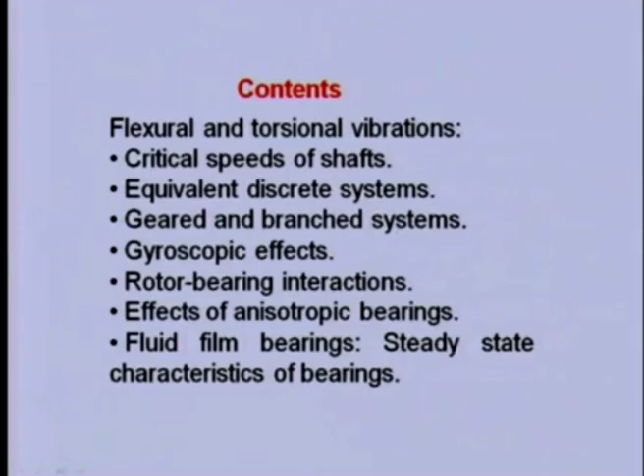Another important bearing is the rolling element bearing. We will see how it imparts stiffness into the rotor system. Generally these are called frictionless bearings, so the damping is less in these bearings. So the property which these bearings carry is stiffness.

Apart from that, the rotors have some kind of instability. There are various ways this rotor can go into the unstable zone. We will study this in more detail. One example is the fluid film bearing itself, which gives instability because in this case we have cross coupled stiffness and cross coupled damping, and they lead the rotor into the unstable zone.

And apart from that, sometimes the rotor has asymmetric area moment of inertia in two orthogonal directions. That also leads to instability because of the parametric excitation of the rotor. When it rotates, this stiffness changes along with the speed, and that gives some kind of parametrically excited vibration.

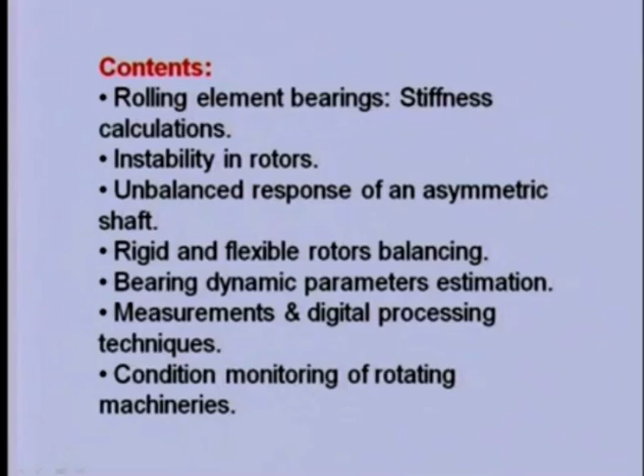Then we will see the measurement and digital processing techniques, especially as we know that in rotating machinery, the dynamics taking place inside the machinery manifest in the form of vibrations and acoustics. So we will see especially the vibrations, how they can be measured, what are the different sensors available, what are the different analysis softwares available, and what techniques exist by which we can process these measured signals and analyze them, especially for the purpose of condition monitoring. We will also look into various kinds of faults a rotating machinery can have, and how they can be monitored through vibration measurement.

Just now we have seen the overall syllabus. This is the overall syllabus, but as we go into more detail, we will have more idea about the subject. Now let us see briefly how I have broken these lectures topic-wise, so we have some idea. These are the module-wise lectures. I may deviate a little bit here and there, but this will be the overall distribution of the various lectures.

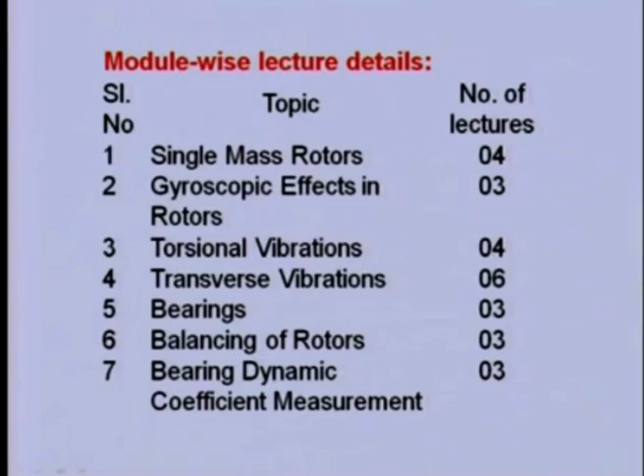Single mass rotor analysis will be around 4 lectures, gyroscopic effects in rotors around 3 lectures, torsional vibrations 4 lectures, transverse vibration, which is a major concern in rotating machinery, will take around 6 lectures, bearing property estimation covered in 3 lectures, balancing of rotor, that is flexible and rigid rotor balancing, 3 lectures, then experimental bearing dynamic parameter estimation, 3 lectures. Apart from this, instability, which is a major concern in industry, will cover 4 lectures. Then there is a phenomenon, subcritical speed phenomena, covered in 1 lecture. Then a very important tool, FEM, finite element analysis of rotor, will cover 4 lectures, and measurement and signal processing in 3 lectures.

Condition monitoring we will cover in 2 lectures.

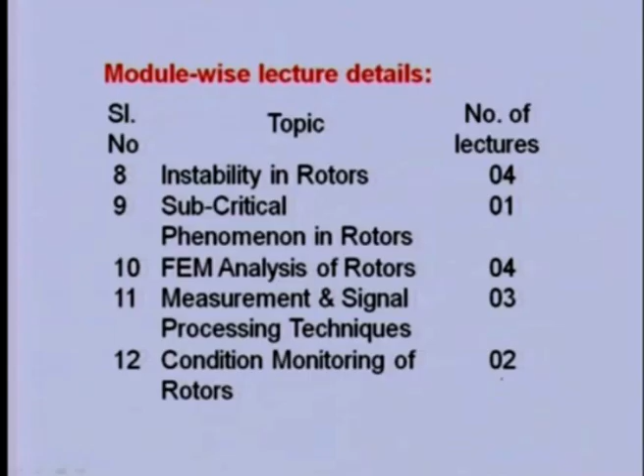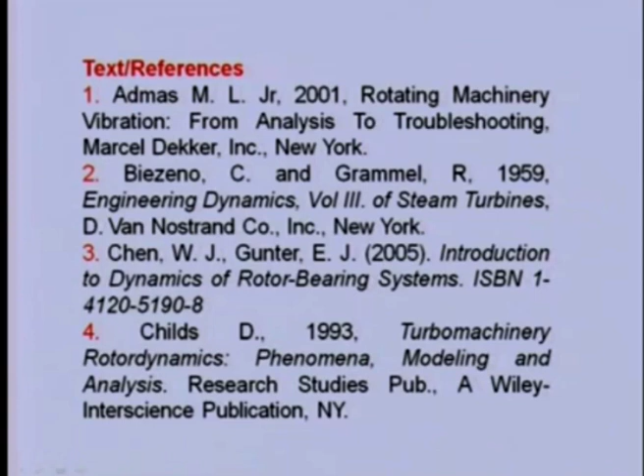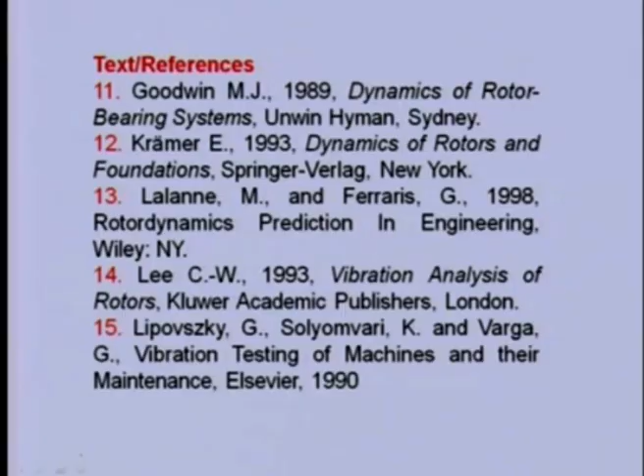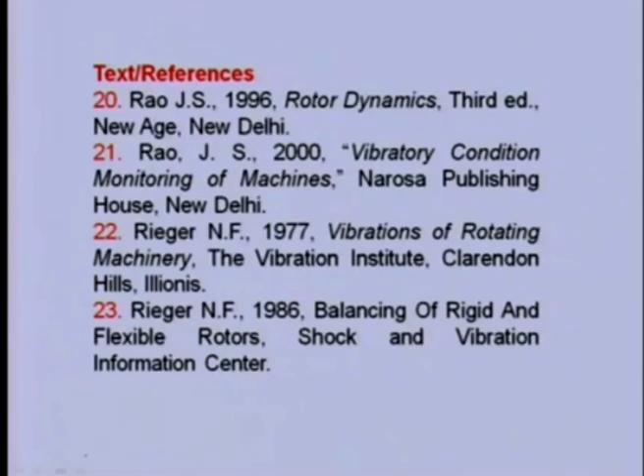These are the various references available. Mostly these references are monographs, where researchers have done their research on rotating machinery and compiled it in book form. These are not textbooks, so I am just listing so many reference books. I cannot read all of them, but you can look into them. These are all text or reference books. There are so many books on this particular topic, all written by eminent researchers in this field. Around 27 books are there, but mostly they are compilations of people's research.

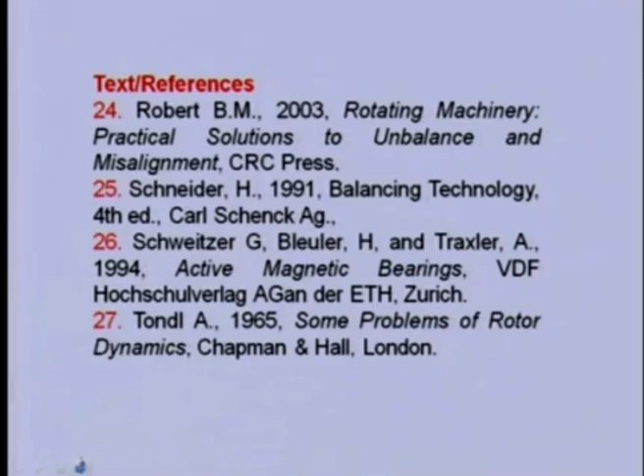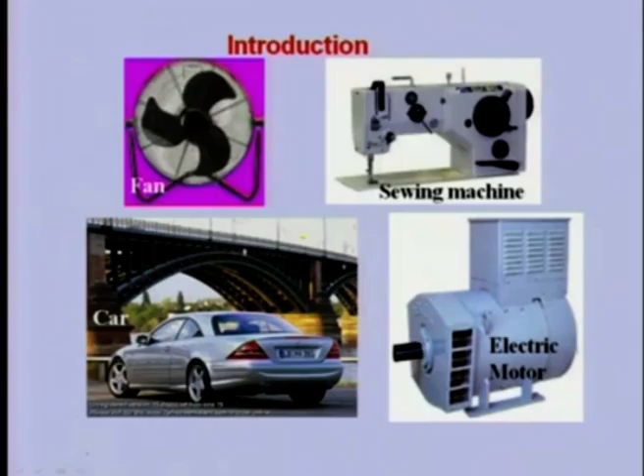So you can see some applications here, like a fan, sewing machine, or car. In these, so many rotating components are there, like an electric motor, all containing rotating parts. Or even a helicopter, where you can see tremendous amount of power in their blades, not only the main blade but also the tail end blades.

Now let us see how a turbine in actual industry is there. You can see a huge turbine with a lot of blades, and in this, a tremendous amount of rotational energy is generated.

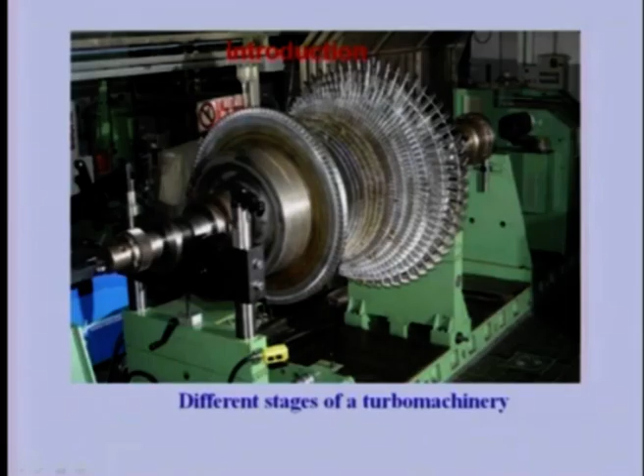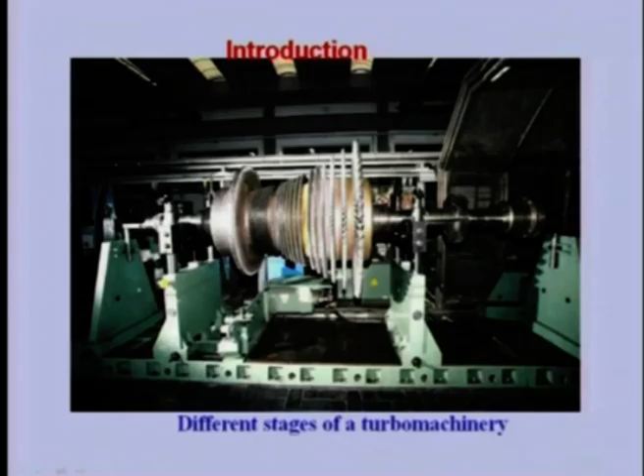This is another view of the same turbine. You can see different stages of the blades. This is the gas turbine in the aircraft engine.

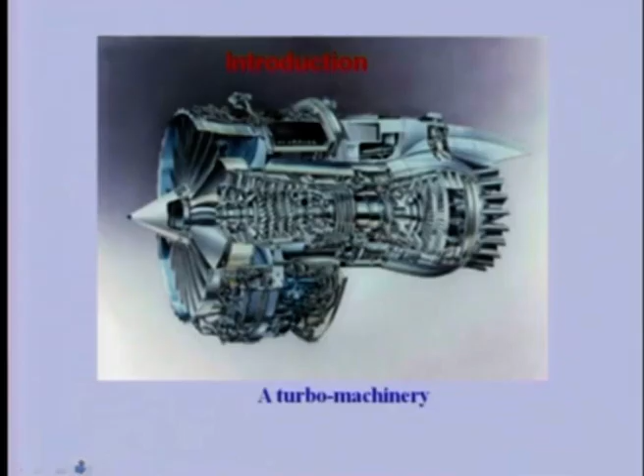Now let us see various components of a rotating machinery. The first thing is the shaft, on which various revolving parts like blades are mounted.

This particular shaft containing discs, blades, everything, that is called rotor. So all the parts which are revolving along with the shaft are called rotor, either in the form of disc, blade, or coupling—any parts mounted on the shaft is called rotor. Apart from that, you can see the bearing which supports this revolving rotor.

The bearing allows the relative motion of the rotor along with the stator. Stator is a non-rotating component, which includes the foundation, in which these high rotational energy rotors are kept. These foundations absorb whatever vibration energy comes from the rotor, and it reduces the vibration of the rotors.

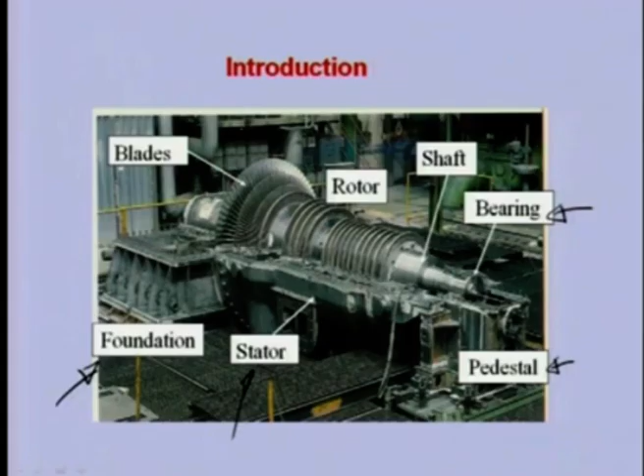So we have three main components in the rotating machinery: there is a rotor, then bearing, and the foundation.

As we go along this subject, various terminology is used in rotor dynamics. So first let us see what is rotor. Again, I am repeating, we already saw in a turbine.

This rotor is nothing but all the components which are mounted on a shaft, including the disc, coupling, blades, fan—any component which is rotating along with the shaft is called rotor. There is a stator which is a stationary part that does not rotate, and in between these two there is a bearing which allows the relative motion between the rotor and the base, that is the foundation or the stator.

Now these rotors, as I told, contain very high amount of rotational energy, and as a rotor dynamics analyst or designer, one has to be very careful that the rotational energy should be maximum, and the vibration energy—because of the flexibility of the rotor or the bearing or the foundation—should be minimum, because that is unwanted for this kind of machinery.

If this is the geometrical center or center of rotation, and if the center of gravity is also at the same place, then there will not be any centrifugal force. But if the center of gravity is offset by some amount from the center of rotation—let us say G is the center of gravity—then you can see that there will be a centrifugal force which will be m e omega square.

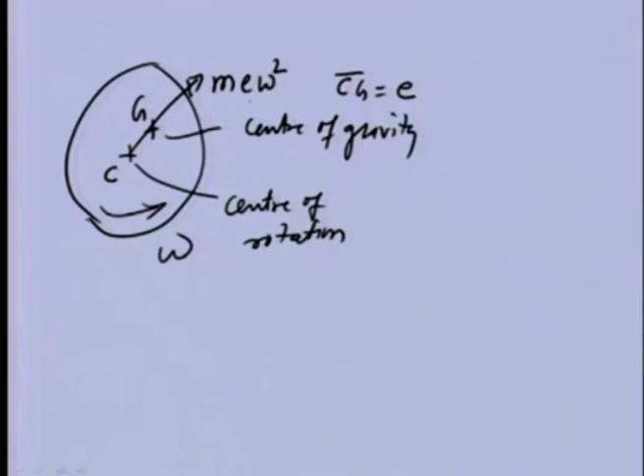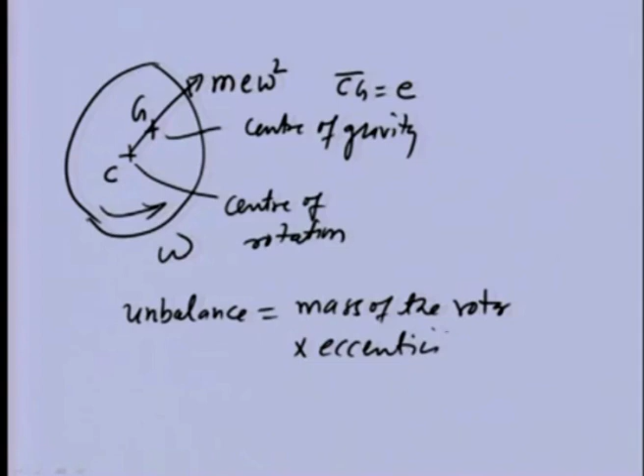M is the mass of the rotor, E is the eccentricity which is the distance between C and G, and omega is the spin speed of the rotor, either in radians per second or in RPM. Here we can use radians per second. When the center of gravity is offset from the center of rotation, we have this unbalanced force. So in rotor dynamics, unbalance is defined as mass of the rotor into the eccentricity. The unit of unbalance is kg meter.

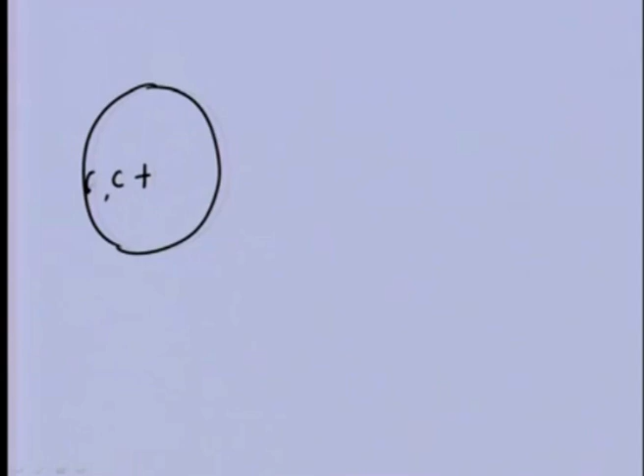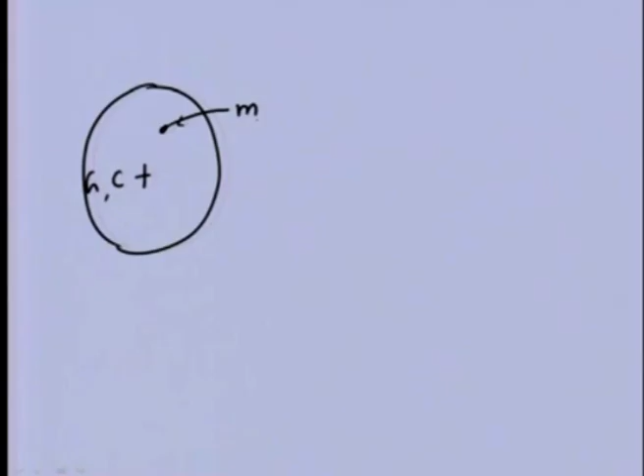Unbalanced force can come because of some other reason also. If this is the center of rotation and center of gravity is also at the same place, but we keep a small mass in the form of a screw, or either add some mass here or cut it out from the rotor, let that be small mass mb at a radius r. In this case, when this rotor is rotating, we will be having centrifugal force, and the value of that will be mb into r into omega square.

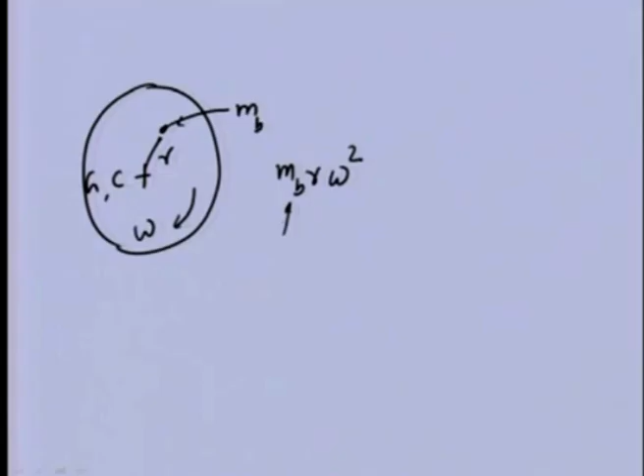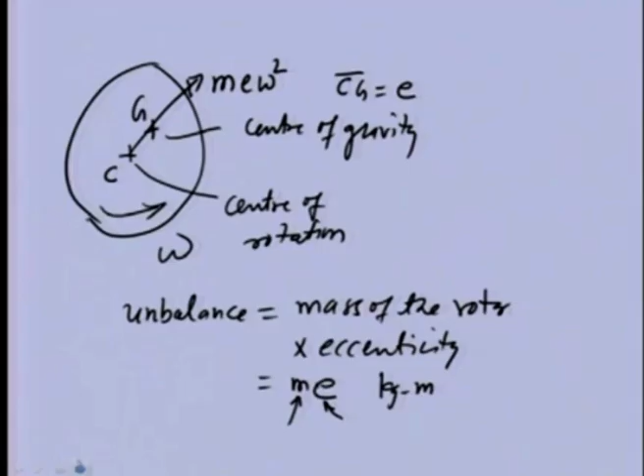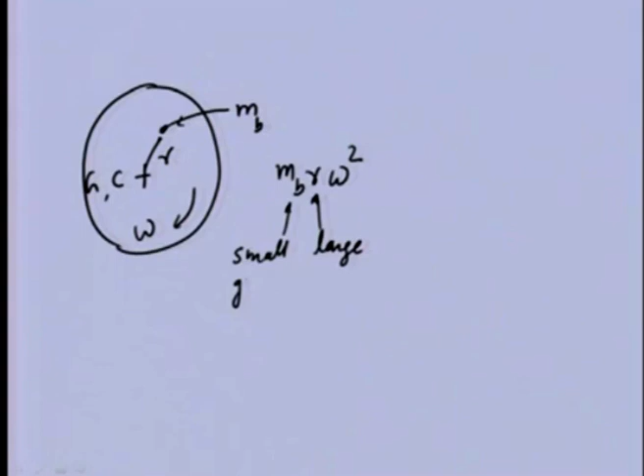This mb is a very small mass, like a screw, which we are keeping at radius r. This particular mass will be small as compared to the mass of the rotor, and this radius will be large as compared to the eccentricity of the rotor. Going back to the previous slide, the mass of the rotor is large, but eccentricity is very small, generally of the order of microns, with the rotor mass around 100 kg or depending upon rotor size. But when we talk about keeping a small unbalanced mass, that will be in few grams, and this radius will be in centimeters, so the value will be large enough. So the unbalance is coming in this case because of some extra mass either we are keeping onto the rotor or removing from it. So this is unbalance.

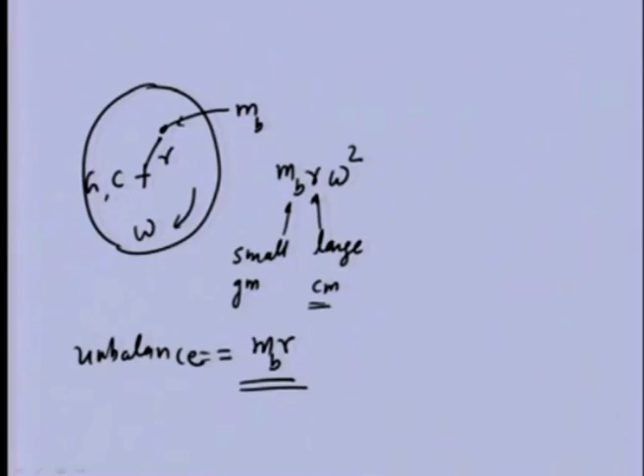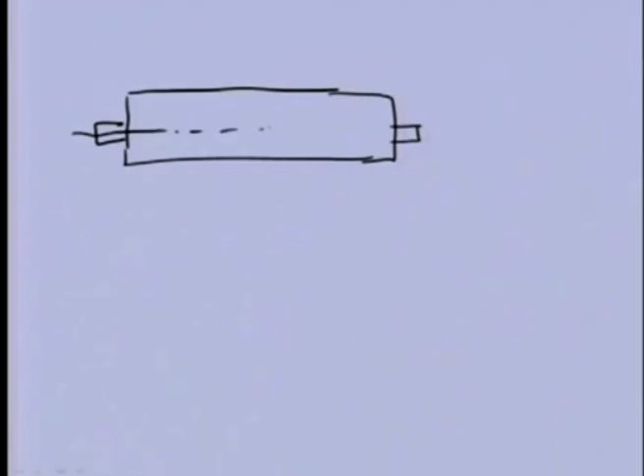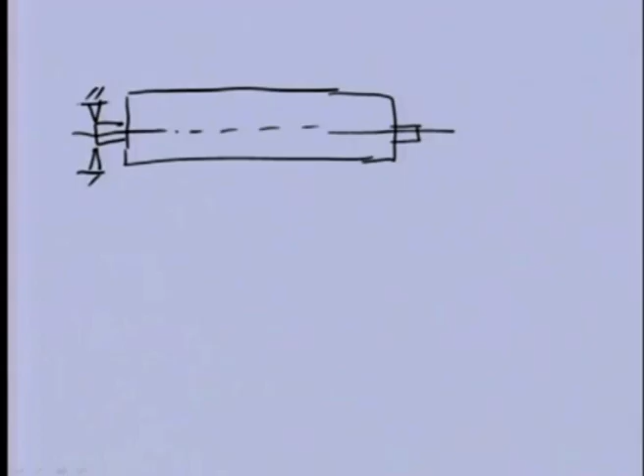If we extend this concept - the previous concept was for the rigid disc, which is thin - but let's say if we have a rotor of this size, which is a long rotor, then we will be having one axis about which this rotor is rotating. There will be some support at the ends, let's say bearing supports, and this rotor is rotating about its rotational axis.

Let's say this is the geometrical center of the rotor, and if center of gravity is also at the same place, then we will not be having any unbalanced force in this rotor. When it is rotating, if center of gravity is exactly at the geometrical center of the rotor, there will not be any unbalanced force.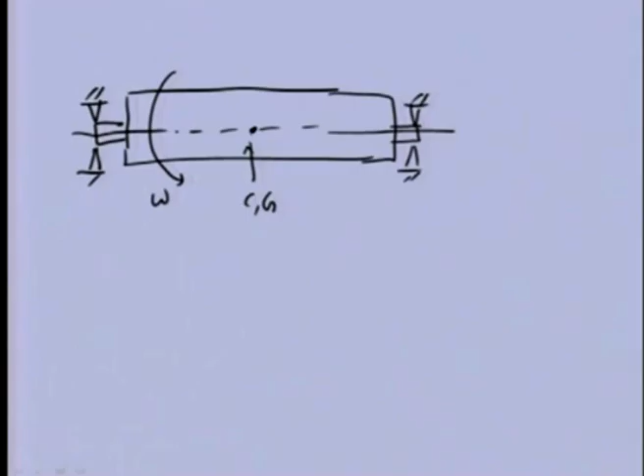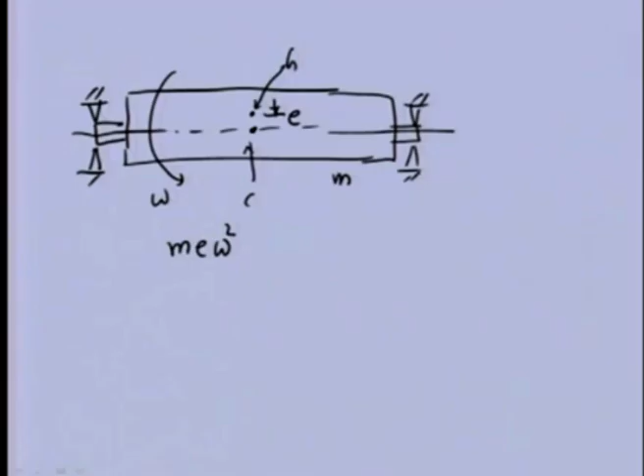But if we have some amount of eccentricity, that means if G is here, not aligned with the center, and this distance is E, then we have unbalanced force. If m is the mass of the rotor, the unbalanced force will again be m e omega square, and this rotor will be having forces at bearing locations. Unnecessary force will come onto the bearing because of this unbalance, because unbalance is unwanted force. So that is unbalance for a rigid disc case, and for the long rotor case we will see in more detail.

Let us see why the unbalance comes in a rotor. Unbalance is actually not wanted in the rotor because it gives unnecessary force to the system, but it comes maybe because of manufacturing, when there are tolerances in the machine components. If we want to make a perfectly circular disc, there will be some deviation, maybe slightly oval shape or some variations along the radial direction. Because of that, the center of gravity will offset from the center of rotation, giving eccentricity, and that gives the unbalance - mass into eccentricity.

Apart from this, even if we manufacture the rotor perfectly, there may be problems during mounting. When we mount the disc onto the shaft, making a hole for mounting, maybe the hole itself is slightly eccentric, and because of that we are moving the center of gravity away from the center of rotation.

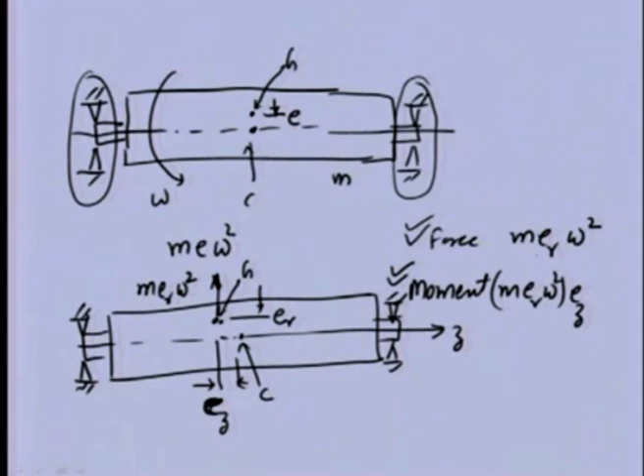This situation is more difficult because now we have moments also. Coming back to the previous rotor where eccentricity was only radial, to balance it we need to keep a mass opposite to the G location, say a small mass mb at radial distance r, such that mb times r equals the mass of the rotor times its eccentricity. With this we can balance that rotor.

But in the second case we have two components, force and moment, so balancing is more difficult and a single mass cannot balance it. We need two places with two mass components: mb1 at radial distance r1, and mb2 at radial distance r2. These two correction masses can be used to balance not only the force but also the moment.

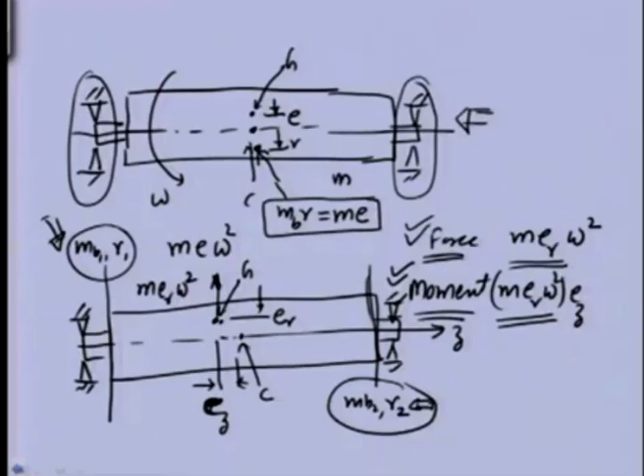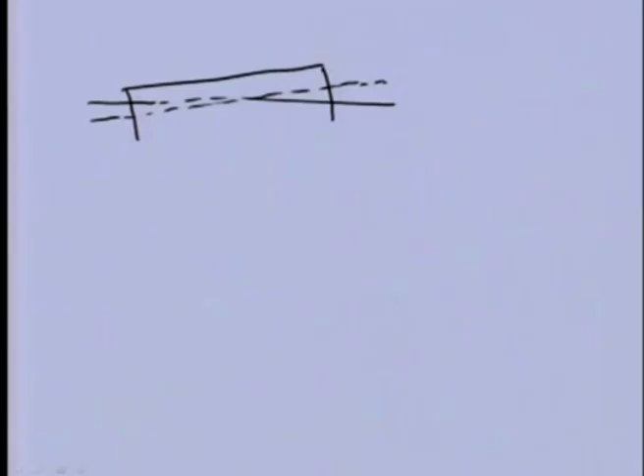Now we will see the same long rotor and how other kinds of unbalance may occur. Earlier we drew the rotors horizontal, but during assembly it may happen that the actual rotor is slightly inclined relative to the center of rotation. I have exaggerated this inclination; in actual cases it would be less than 1 degree. So the rotor is mounted slightly inclined.

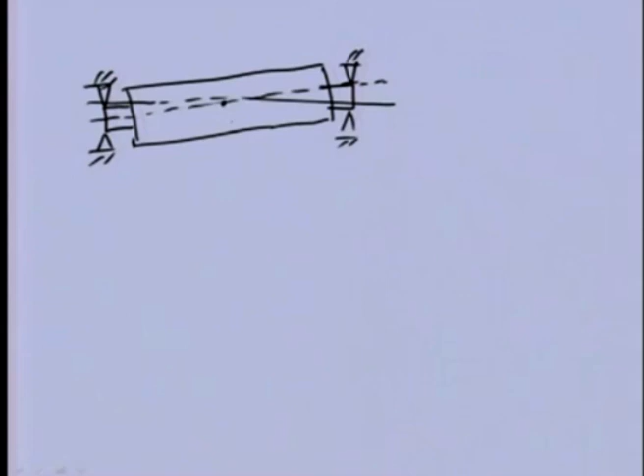Here the center of gravity is at the center of rotation, but the rotor is inclined at some angle phi. The mass of the rotor is m, and the diametral mass moment of inertia of the rotor is ID, taken about one of the diameter axes, perpendicular to the rotor, not along its axial direction.

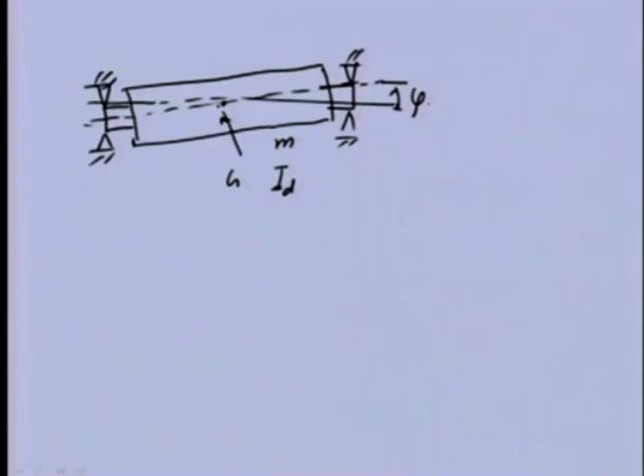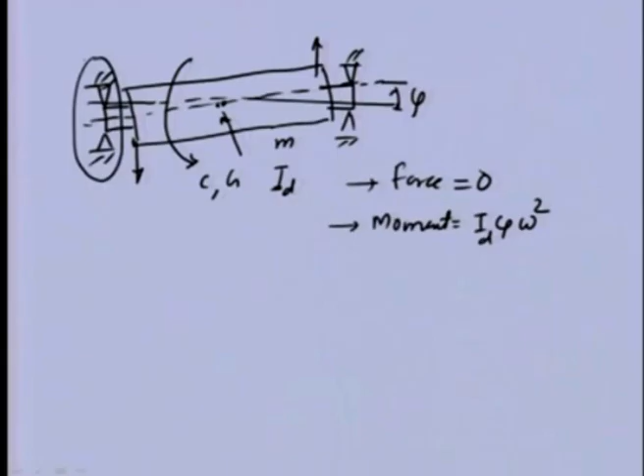In this case, when the rotor is rotating there will not be any centrifugal force—the force will be zero because the center of gravity and center of rotation are at the same place. But there will be a moment. Because the rotor is inclined, there will be some moment of this value, though no force. Because of this, the bearings will take unnecessary load, and to balance this we again require two masses, as before, placed in two different planes.

This particular kind of unbalance in the rotor is generally called dynamic unbalance, in which we require two planes to balance rotors.

In the next situation, when the rotor has inclination as well as the C.G. not at the same place, there will be not only moment but also force, which is m_e omega square if only radial eccentricity is there. If axial eccentricity is there, then we'll have this moment as well as the moment we already saw in the previous slides. So there will be two unbalanced moments, one and another.

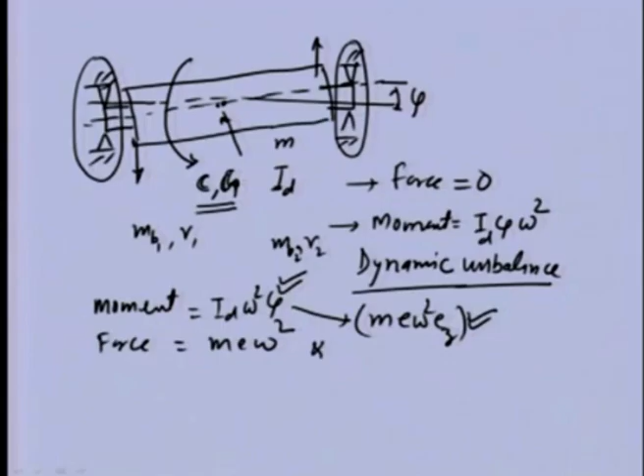We have seen how unbalance can come in a rotor. These unbalanced forces will give some kind of unwanted force or moments into the rotor, and when the rotor has flexibility, either on the shaft or at the bearing, unnecessary transverse vibration will take place.

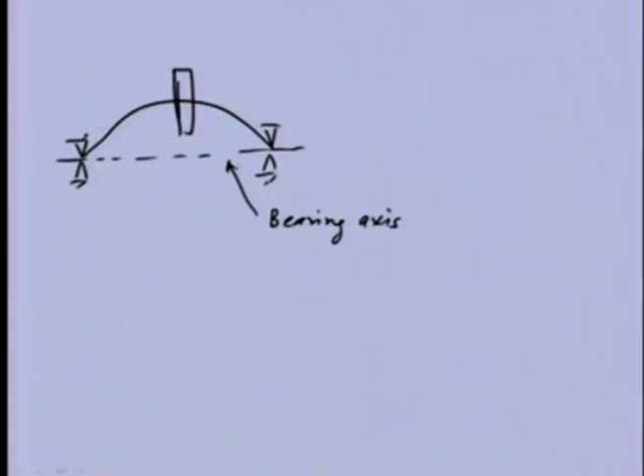Now let us see how a rotor with a flexible shaft can have vibration. Let us say there is a rotor, a flexible shaft, and a disc. When this rotor is at rest, it will obviously be aligned with the bearing axis. But as it starts rotating, because of unbalanced force, it will try to deflect and have some transverse vibration.

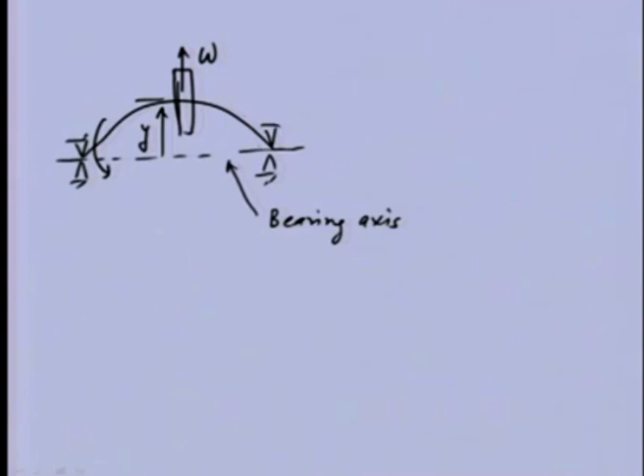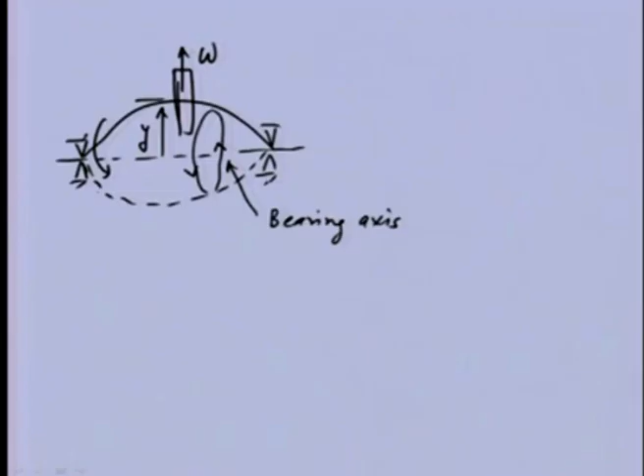This transverse vibration, as it rotates, will cause the rotor to move to this side also. So it will move in either a circular path or an elliptical path, depending upon the property of the bearings at the ends. There are two motions of the rotor: one is spinning about its own axis, and the other is this transverse vibration, which is called whirling of the shaft.

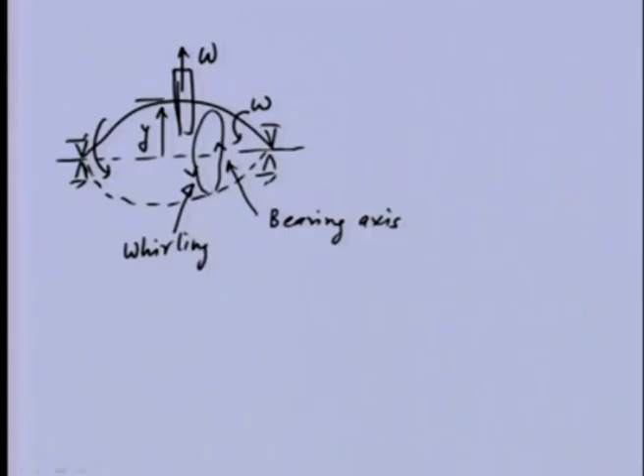Let us see this motion in this model. A simple disc and flexible shaft are there. One motion is the rotation of the disc revolving about this axis. Generally, this disc is fixed onto the shaft, so when the shaft rotates, it revolves along with it. When there is unbalance, the shaft will deform like this, and it will start revolving about its bearing axis like this. So not only is the disc revolving about its own axis, but the deflected shaft itself is revolving about the bearing axis. There are two motions.

This motion is called whirling. The first one, which is the revolving of the disc about its own axis, is called spinning. This is spinning motion, and this is whirling motion. Here also you can see the whirling motion of the shaft. This is the phenomenon a rotor will have when it has some kind of unbalance.

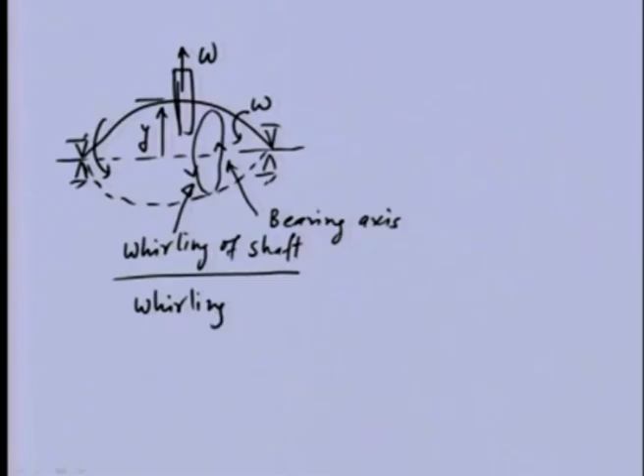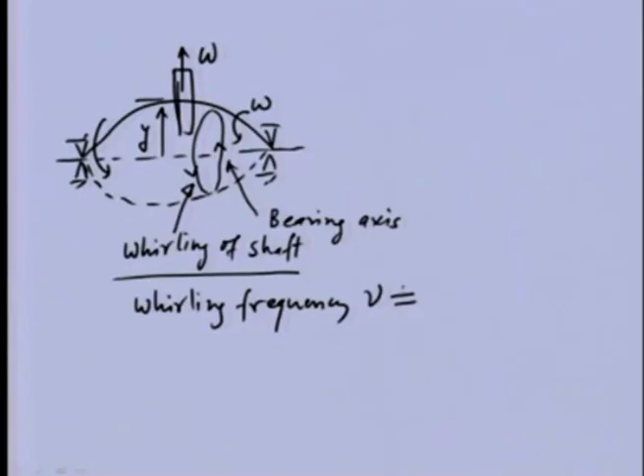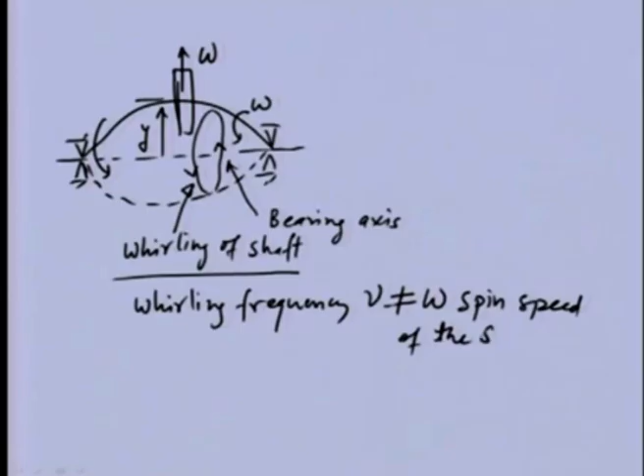You can see that the whirling of the shaft has a whirling frequency, which we generally represent as nu. In general, this will not be equal to the spin speed of the shaft, omega, which is the spin speed. But if this whirling is due to unbalance, we expect nu is equal to omega. That is called synchronous whirl, where the whirling frequency is the same as the spin speed.

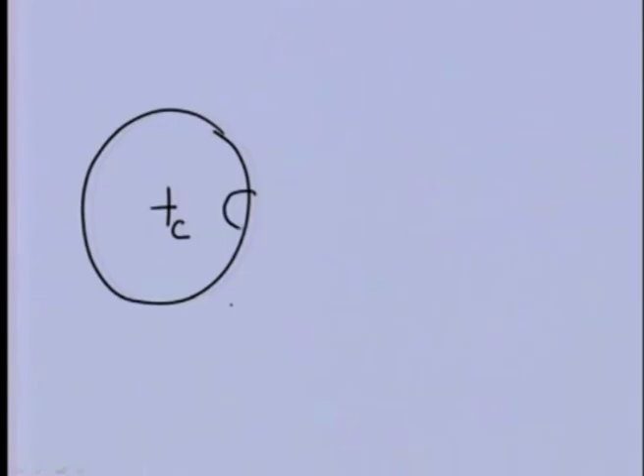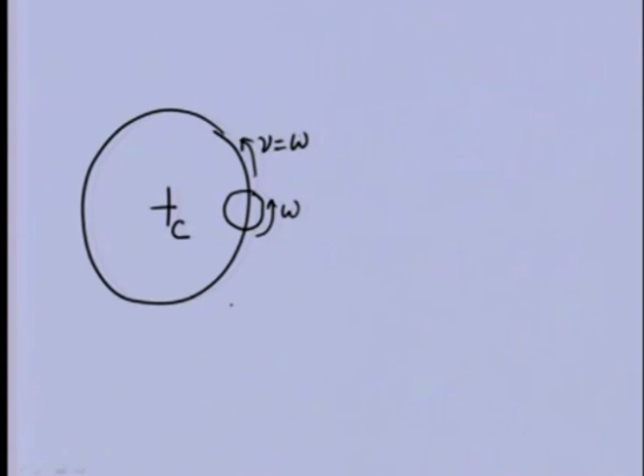Let us see this motion in more detail. Let us say this is the bearing axis. During whirling, the shaft is revolving in a circular path. Let us say this is the shaft position at one place, and this is the direction of the shaft spinning about its own axis. It is also whirling with omega, so after some time it will occupy this position, or this position, or this position.

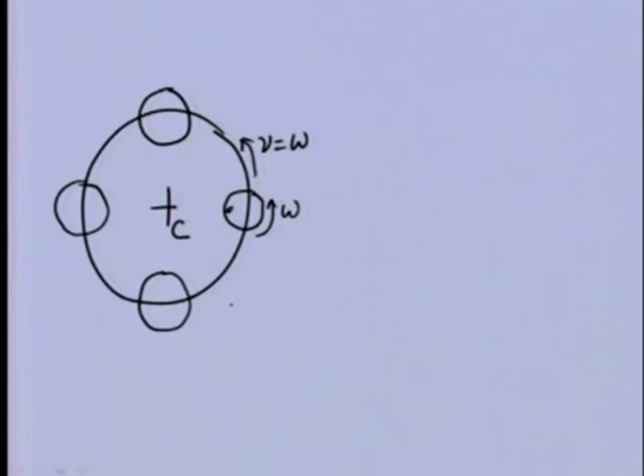If we mark a point onto the shaft here, and the whirl frequency, which is the orbital frequency, and the spin speed, which is the revolving of the shaft about its own axis, are the same, we expect this point, when moving, will occupy these positions. So what is happening in this case? If we are sitting here and looking into the shaft, we will see the same face of the shaft all the time during this motion. This motion is called synchronous whirl.

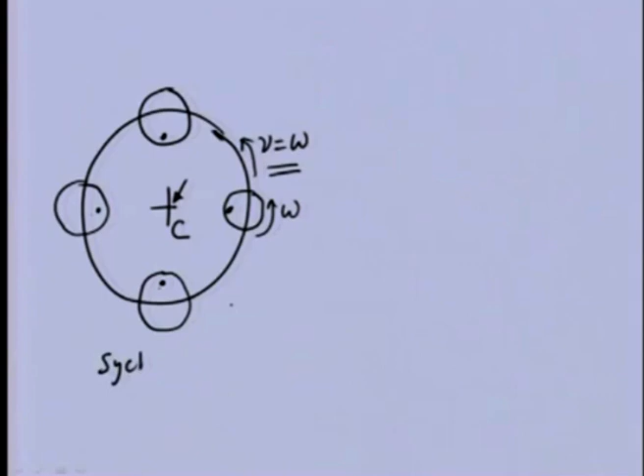In real case, generally the earth and the moon have this kind of motion, and because of that we see the same face of the moon from the earth, because they have synchronous motion. The spinning of the moon and the orbital frequency of the moon are the same, and because of that we see the same face of the moon. Here also we have the same situation.

If we have another kind of motion, let us say when the whirl frequency is equal to minus omega, we can categorize this as anti-synchronous whirl.

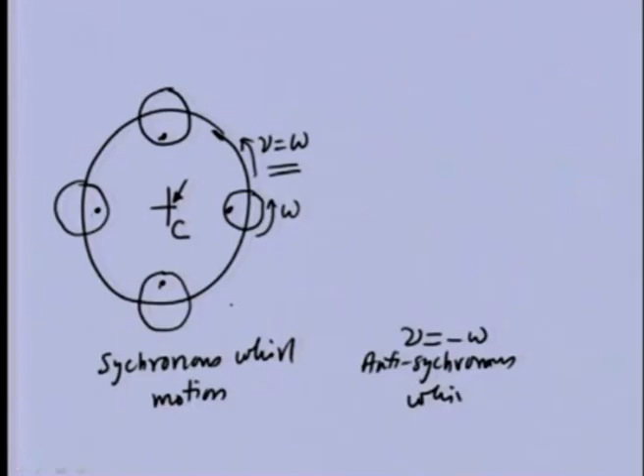In this particular case, let us see. If we take one point here and try to see its location at other places, we will see that when it comes here it will be outside, when it is here it will be inside, when it is here it is outside. Now what is happening? You can see that when the shaft has one revolution, from this place, then here, here and here, the flexural motion of the shaft is taking place twice.

In the previous case, the synchronous case, the shaft has no flexural motion. So the shaft bends for the synchronous case, and as a rigid body it revolves about the bearing axis. This is synchronous motion, in which there is no bending and tension-compression of the shaft is not taking place, but it bends and revolves as a rigid body mode. That is a synchronous whirl.

But in the anti-synchronous whirl, it will be having bending, and the frequency of that flexural motion will be twice per revolution. Now let us see a more general motion in which nu is not equal to omega.

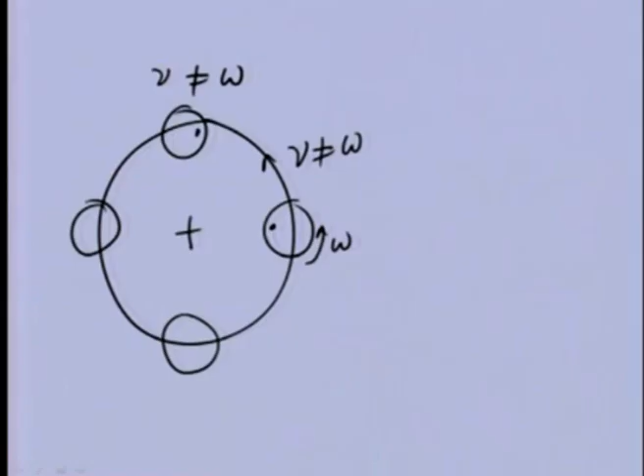In this particular case, you can expect that the shaft, when it is revolving, this is omega, and this is nu, which is not equal to omega. So for this particular case, it may take various positions depending upon the relative value of these two. So there will not be any fixed pattern, but it will depend upon the value of nu with respect to omega.

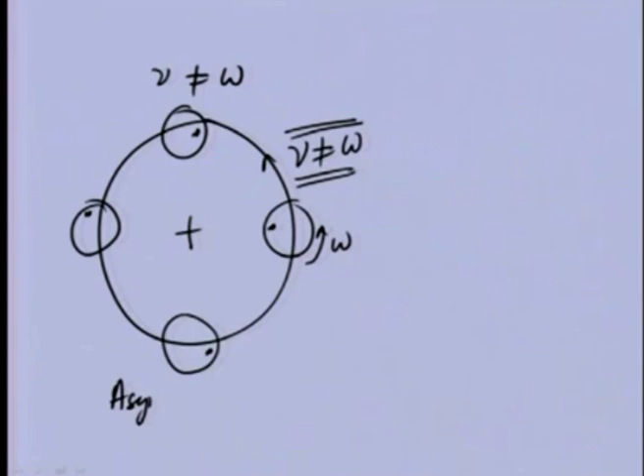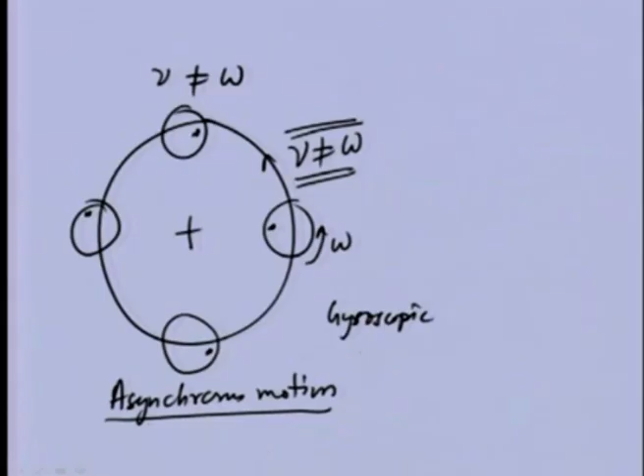This particular motion is called asynchronous motion, and generally this motion takes place when we have gyroscopic effect into the system. This we'll see in subsequent classes.

So to recapitulate what we have learned today: initially we started with introduction to the subject. I showed you all the content of the subject and how various lectures have been divided into various topics. Then we saw some applications of rotating machinery, and we found that in day-to-day life and also even in planetary motions, these kinds of rotating motions are taking place, and the study of this rotating motion and its dynamics is very important, especially for machineries.

After that, I introduced a few concepts, like the unbalance in the rotor, and we have seen that there are two types of unbalance which come into the rotor. One is the static unbalance, which generally occurs in thin discs, and there is dynamic unbalance, generally in long rotors, and we have seen that for dynamic balance we need two planes, two correction masses to balance that.